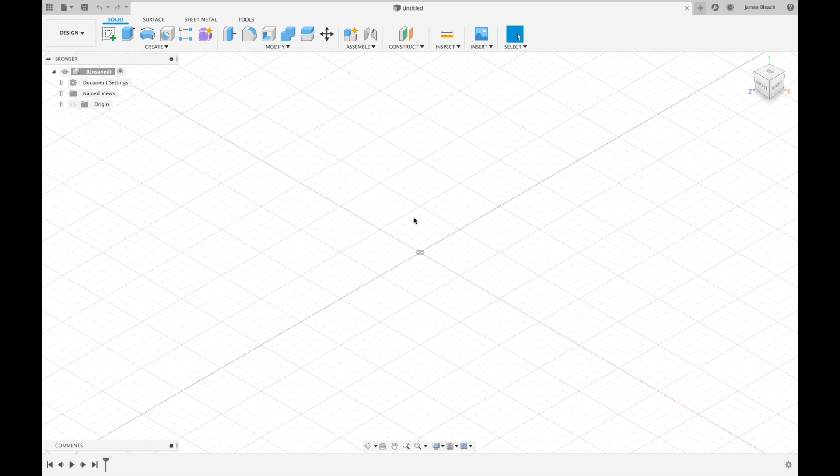Start this next session to create the buttons by opening up Fusion. You should find that you're in the blank work area. Go onto the data panel, which is where we saved our work, and you should have a folder called JBL Projects, which if you double click on, you'll be able to locate your progress so far. For mine, I've created a series of folders and named them, which makes it easier to navigate in future.

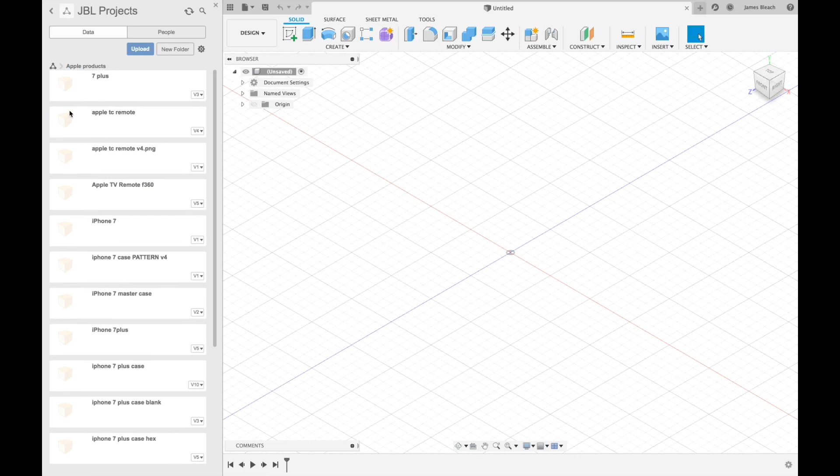So if I go into Apple products, and down to Y9 lesson 1, and double click to load up the model, you should be able to see the progress that we made so far.

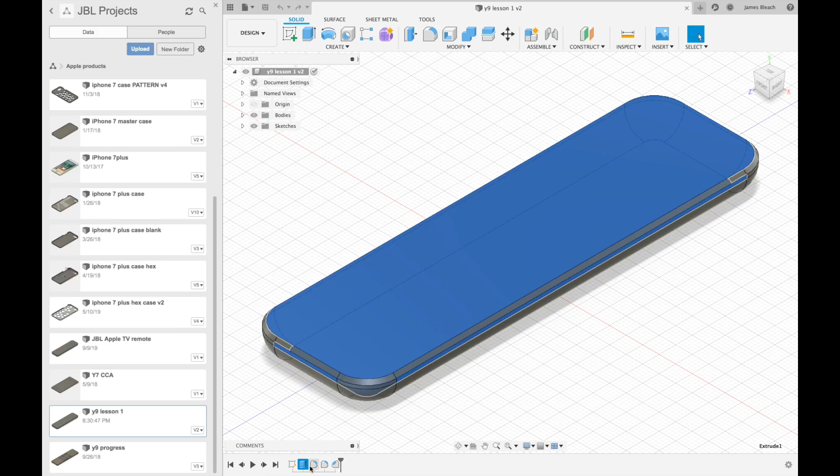As a reminder, we created our original sketch, entered the dimensions, we then extruded, added a round to the corners or a fillet to the corners on the bottom edge, and then we chamfered the top edge. I'm going to close the data panel just to move it out of the way.

I want to work on the top surface now to create the buttons. Down here we have a timeline of the jobs we've done so far. This is useful if we ever have to go back and edit one of the features from earlier on. So if I want to edit one of the chamfers, I can right click and edit the feature to enter a different amount.

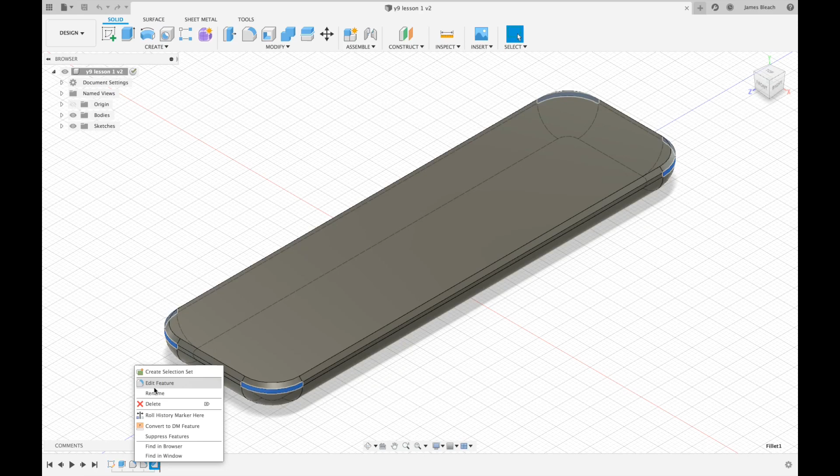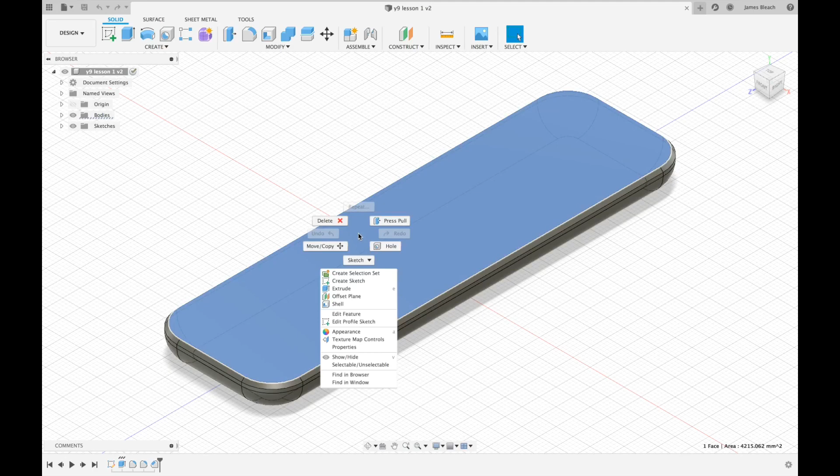Now we're going to be working on the top surface, so we need to first select that top surface. You know when it's highlighted because it will be in blue, and you can either go up to create, then create sketch, or when highlighted you can right click on your mouse and create sketch. That should flip you to a bird's eye view or top view, which is the easiest face to work from. If it doesn't flip and you're still on the home view, you can then click on the top.

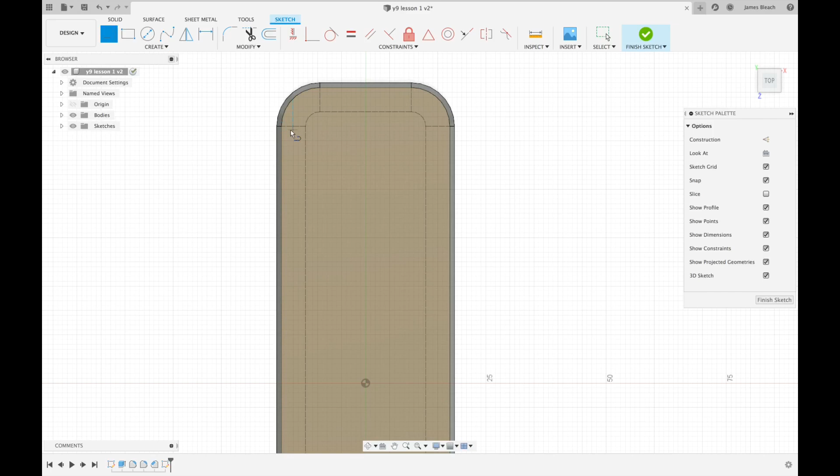Now I'm going to create the buttons. In order to do this I've measured the Apple TV remote, and I can see that the center of the first, or top left button, will be 47mm from the outside edge. So I'm going to mark that out first using the line command, touching the outside edge and clicking and dragging a line, and as long as it's straight I can let go of the mouse and enter 47.

By pressing return it drops a line, and I can then select the line so it goes blue and press X. This turns it into a construction line, which just helps with marking out the actual shapes we're going to use.

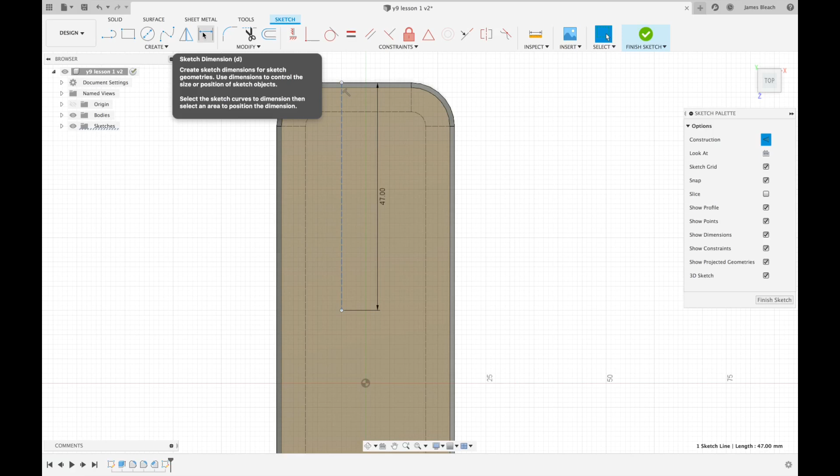Now not only is it 47 from the top, but it's 11 from the side. So this time, rather than draw a line, I'm going to use a dimension tool, which allows me to click between two lines and see what the dimension is. So here I'm going to click on the outside line and this line, and I can see that currently it's 13.5mm. Now I want that to be 11, so I'll enter 11 and press return, and it should jump our original line 11mm from the edge.

So now I know that this central point here is going to be the center point for our first circle, or for the first button.

Now again, up here these are shortcuts, or icons for particular buttons. They're not always the ones that we assume them to be.

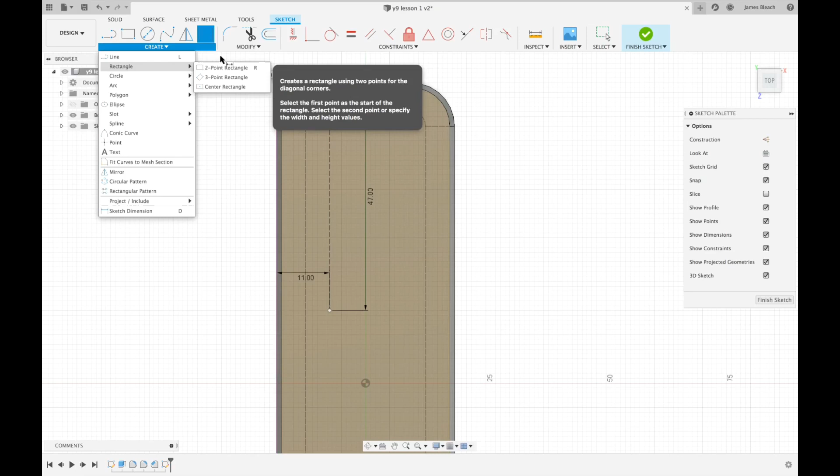So here we have a 2-point rectangle, and we quite often use different rectangle options here, so bear that in mind. But we are going to use a center diameter circle.

So from here I'm going to hover over the end point, click and drag and let go of the mouse, and enter 12mm for my first button, press return.

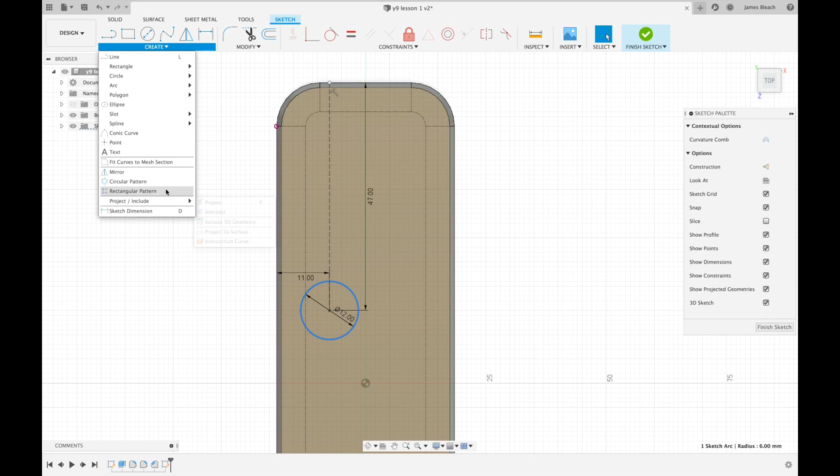Now rather than copying and pasting, I'm going to select the line and use a feature called rectangular pattern. This will allow us to duplicate our sketch in rows or columns, and we can enter the distance but also the amount of circles that we're going to do as well.

So I'm going to start to drag circles across, and by default it does 3. Now we need to move it across by -16, and if I press tab I can change it just to 2 buttons going across the top.

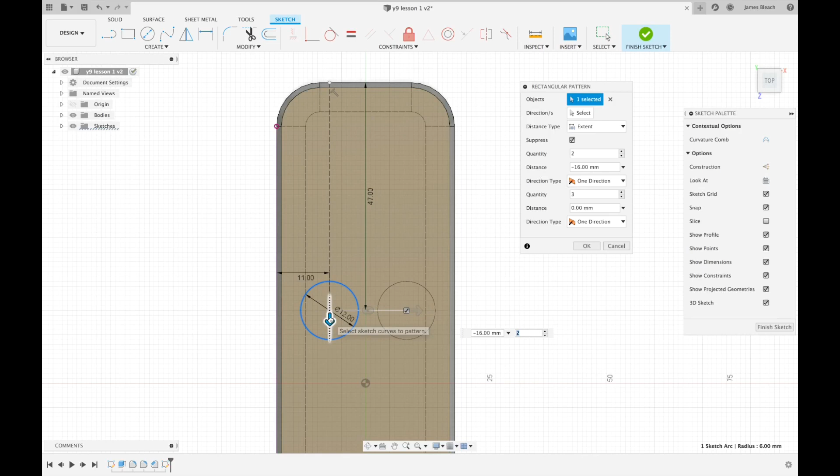Now before pressing enter to confirm, I'm going to also drag the buttons down until my middle circles reach the center point, and you might have to adjust your view on the screen. So that should be 30mm. I'm going to press return to confirm.

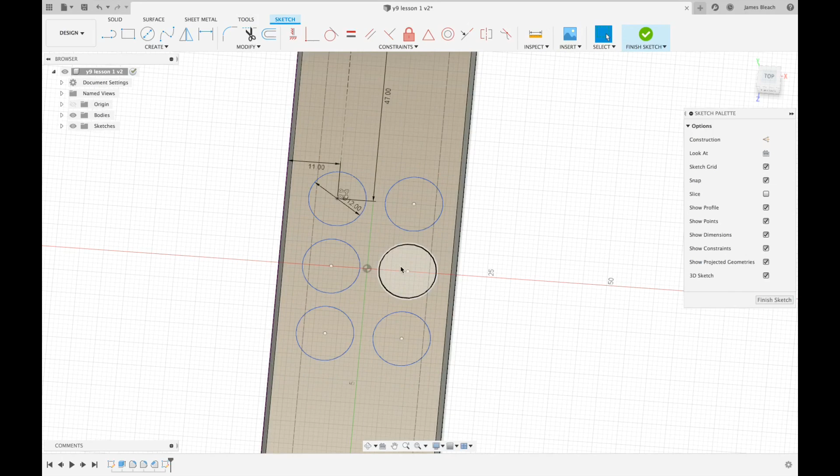Now you'll notice that the buttons we have drawn so far are almost correct, but we need to join these two circles here. So the way to do that is to take the line tool.

I'm just going to check that this is straight. So I'm going to take the line tool up here, and I'm going to join the left-hand side of these two circles and the right-hand side of these two circles.

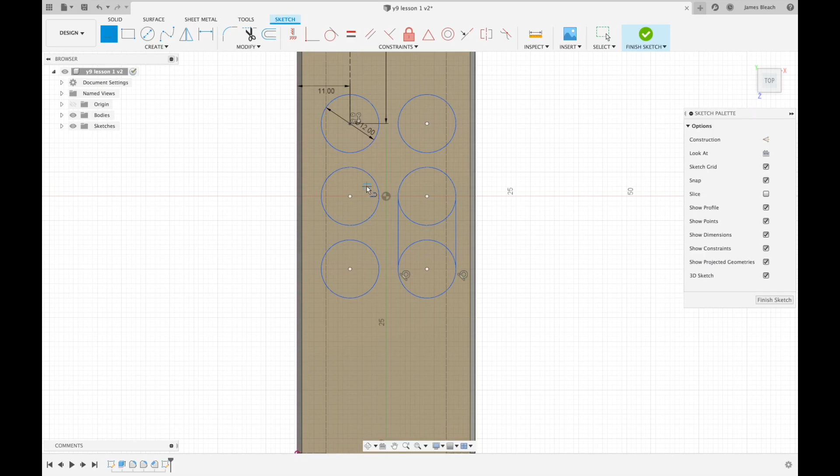Now, if I was drawing this by pencil on paper, I would just rub out these two semicircles here. So we're going to use the trim tool, which can also be accessed by T as a shortcut.

I'm going to click on trim, and I'm going to delete this part and this part. Now, if your whole circle highlights, that means one of your lines that you drew is not connecting up to the circle. So hopefully it will allow you to trim this part and this part.

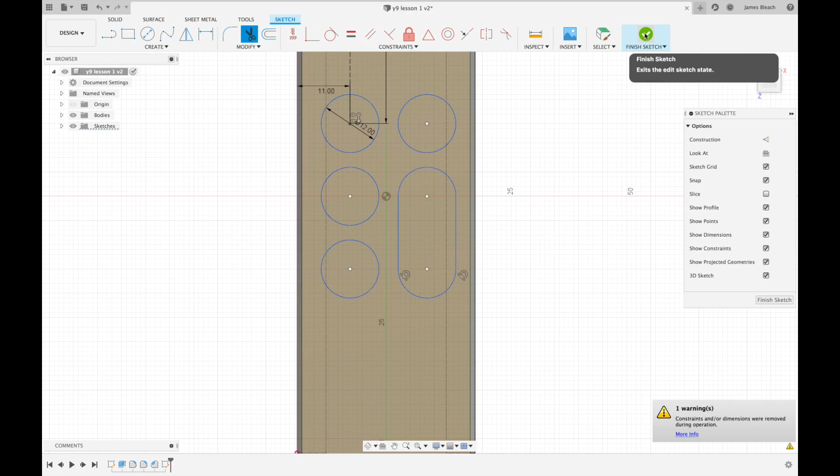So now our drawing is complete. We're going to go up to Finish Sketch, and we're going to use Extrude. So we can either create and extrude, we can hit the letter E, or we can use the extrude icon here. So I'm going to choose to extrude each button by 0.2 and press return, and I can now see that the buttons have been raised.

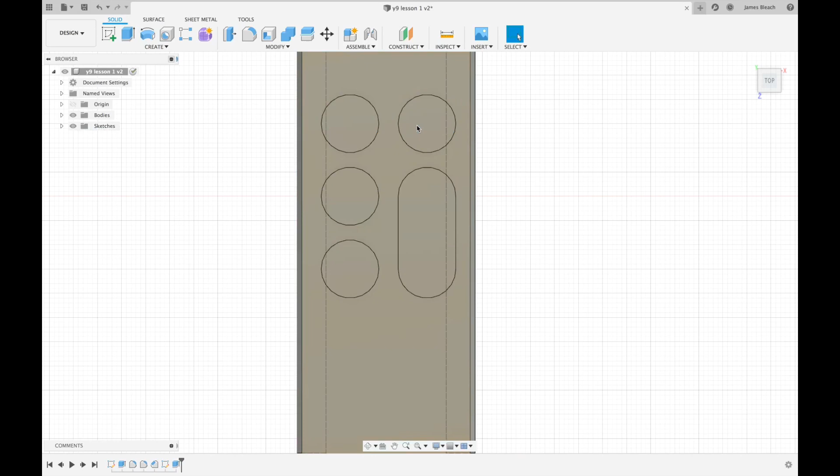Now, to finish off the buttons, I think that we should add a slight fillet to the edges. So this time I can press modify and fillet, or you can use the F shortcut.

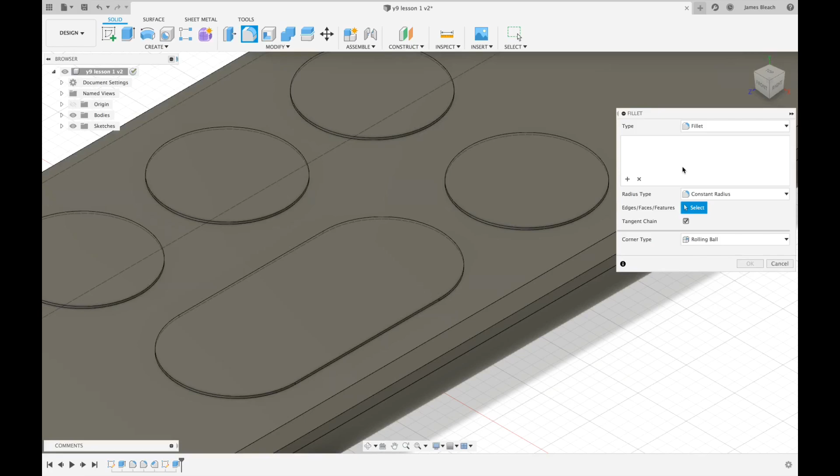So I'm going to click away, and I'm just going to press F on the keyboard. You can see that it opens the fillet box. So I'm going to choose each of the top edges, and if it doesn't select the full shape, select the rest.

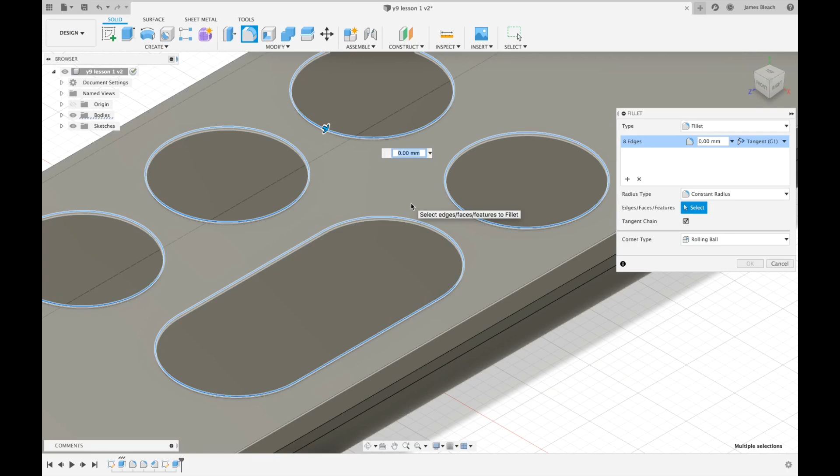I don't need to hold shift this time because this command box is already open. So it's asking me which edges I'm selecting. Now, because I raised it by 0.2 of a mil, I need my fillet to be less than that, so I'm going to go for 0.1.

I'm going to press enter, and you'll see if I zoom in, we've got that slight filleted edge on there. So that's how to add the buttons initially.

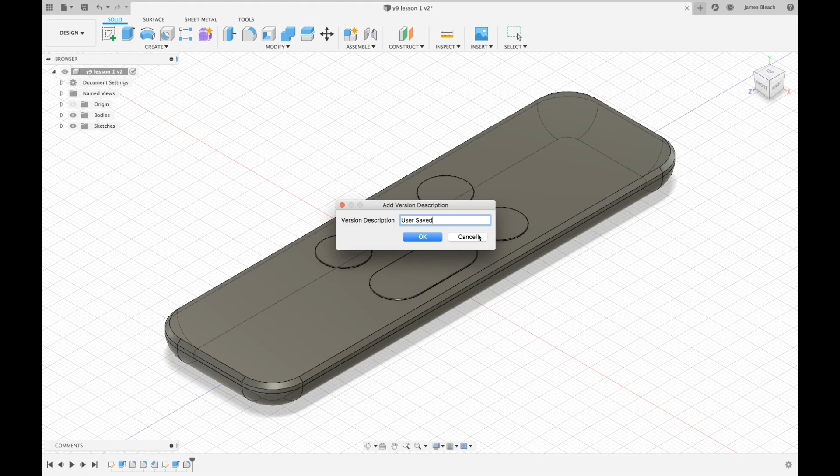I'm going to return to my home view, and I'm going to press save. Now, it will ask you whether you need the description to just be the user saved. You can name this stage, so in this case, I'm just going to call it buttons and press OK.